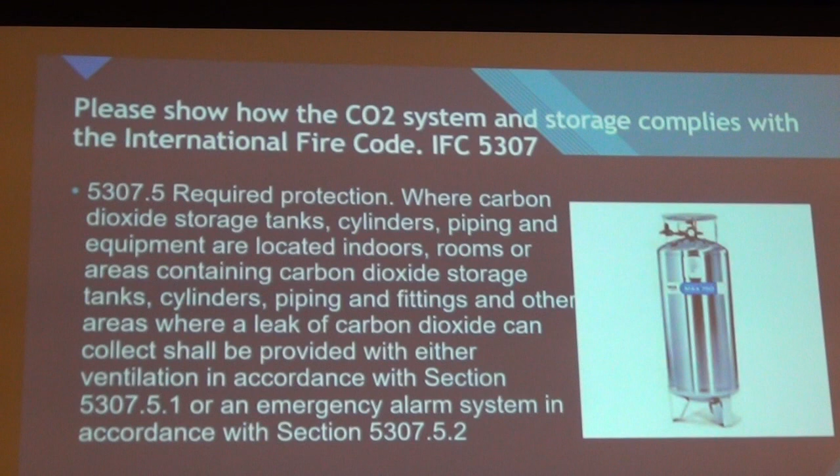So is multifamily considered commercial or residential? They said single-family dwelling units. When does it kick in? Six units? Five and less are 1. Okay, and anything over 5 would be. Okay, so there it is. Norwood used to work for the state. And by the way, it doesn't matter what the BTU input is. It doesn't? Oh, okay. It used to. It doesn't anymore.

Can I add more on that CO2 thing, just real quick? We can teach the whole class on it, but there's just some bullet points I want to throw out there. Number 1 is, these beverage companies, they were the ones that were installing these systems for years with no permits, no licensing, and no detection, right? But when we all of a sudden regulate and say you need a detection system, who's the first one that wants to install said detection system? The guy's been doing this work illegally for years. Yep. Is he qualified? No, he doesn't know what he's doing.

They like to install those plug-and-play ones. So they brought a guy to some fire inspectors group. The guy came in and he says, yeah, these are pretty cool. You can just plug these into the wall and they're easy to install. And when he was done with his presentation, I said, can I say something? And I went over and I unplugged it from the wall, and I said, yeah, and it unplugs just as easy as it plugs in. End of conversation.

The audible visual should be just as intelligible, visual, audible as a fire alarm system. As a life safety system, we have to back up and ask ourselves, why is this system here? Is it here just to look nice, or is it supposed to actually do something? It's supposed to get people out of the building, notify people, right? You can't do that with a little horn on the wall that sounds like your computer battery's low.

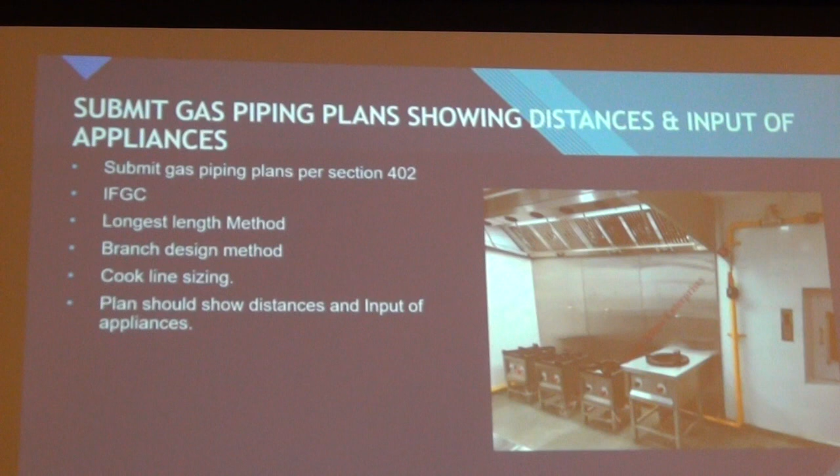Okay, this was a change in the 2015 code, and that is concerning, and I could teach like an hour on this, but we'll go over it real quick. Kitchen cooking appliance, type 1 or type 2 cooking hood, or the reasons for exemption per 507.1. What the code used to do, it used to list the appliances that you didn't need hoods. Well, they took that away and basically said all cooking appliances need hoods, but here we have exceptions.

And some of the exceptions are that it's been tested. What's that UL standard with the 5 milligrams or whatever of grease? Well, it also matches up with the NFPA standard 96. UL 710B. Okay, with that requirement, there's more to it than that. And a lot of people don't know that. That test that UL does actually will tell you what type of meats or what type of stuff was tested with it.

So if the test says boneless chicken, white meat, was done in the test, and they're using it to cook hamburgers, that's not what the test says. So each manufacturer will actually tell you the UL test results are based on what type of foods it was below that threshold. Do you understand what I'm saying here? That they're not out of the woods. Yeah, so you gotta look and see what they're gonna use this vent-free appliance to cook.

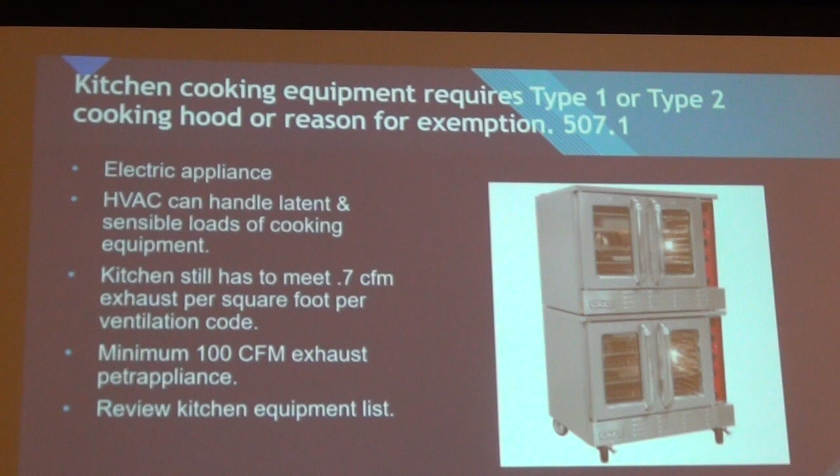Wow. But Firehouse Subs is one, they'll have all those hot water baths where they dip all the meat in to warm the meat up. There's a huge latent load. All right. And in the general statement in chapter 5 concerning kitchen exhaust, we do have to handle steam and heat, it says. So the way to do that is with an air conditioning system.

Provide information that all appliances regulated by the code are listed and approved. Certain kitchen equipment, especially those that are foreign made, some of the stuff, especially some of this Asian stuff, is not listed by a listing agency.

And you've walked into kitchens before, especially ethnic restaurants. I had one where they took an oven and got the whole oven out, and they cooked their ducks in there. And all they had was a manually lit burner going in there. I don't know where they got the burner, but it wasn't a standing pilot. That's illegal. I know. And you light the burner, and that's how they would cook their ducks or goose or whatever.

Remember Christmas Story? That duck was smiling at the guys and chopped the head off.

So that was a type of restaurant. It was a buffet type restaurant. And I said, no, you can't have that. And then the other thing is the cut sheets will usually state the listing agency. Then I applied for a code change and it got knocked down.

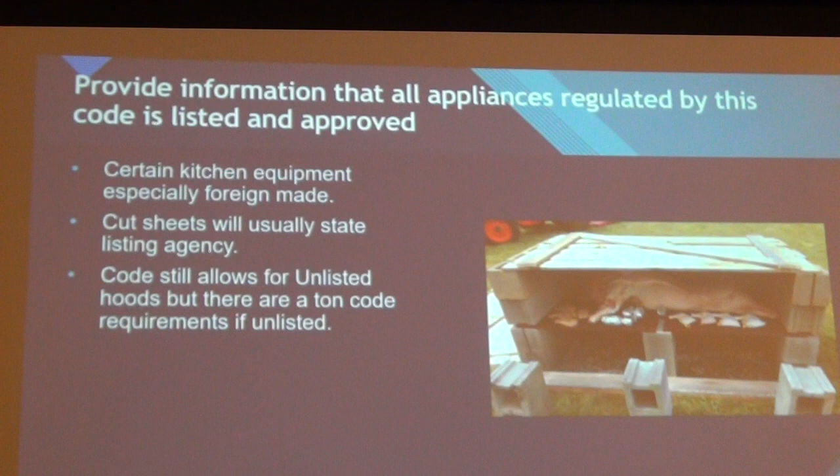Well, we get stuck with this sometimes. Yeah, we've been there. Provide information that the cooking hood provides the required CFM per the type of cooking done. In other words, the cooking hood will tell you how many CFM are required depending on what type of cooking you're doing: light duty, medium duty, heavy duty, or extra heavy duty. So you want to find out if that hood can handle the appliances that they're putting underneath it.

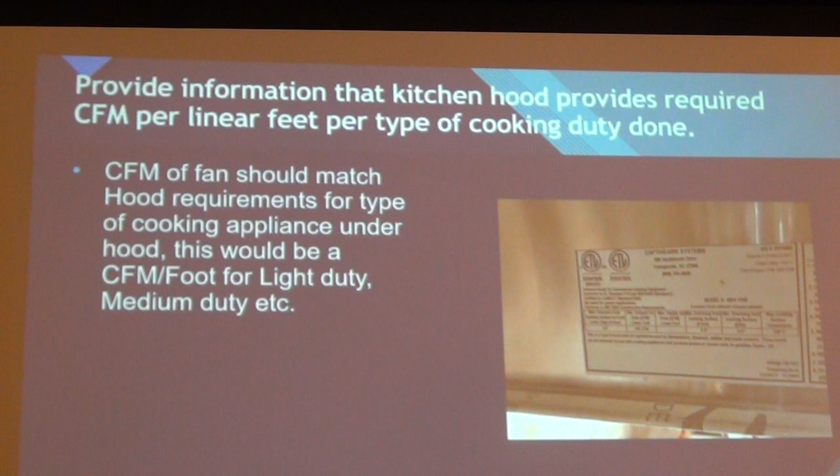In the next section, well, that's a double, hold on. That was your code change anyway, wasn't it? Yes, I'm proud of that.

What happened was, if you looked at the labels, and CaptiveAire finally got online with me for that. I had a discussion of about half an hour with their headquarters. The label used to tell you how many CFM per linear foot per temperature of the cooking appliance. And we don't deal with that in the code. We deal with a list of light duty, medium duty, heavy duty, and extra heavy duty.

I says, well, that label, we'll see a slide here in a second, will have to state that on the hood, tell you that, so whatever the CFM per linear foot, and you make sure that on your balance report for the hood that it is providing that required amount of CFM for the type of hood required.

Kitchen exhaust termination. In Royal Oak, this is a real big problem because everything's crunched together, but you want to know how far the exhaust is from air intakes. They're showing here on this plan, this is good how they did this, they're showing all the distances for it. Also, the exhaust has to be 10 feet from the property line. There is an exception, you can go down to 5 feet if it discharges not onto the property line. As far as that goes, it's discharged away, so if it's an upblast, then it's fine.

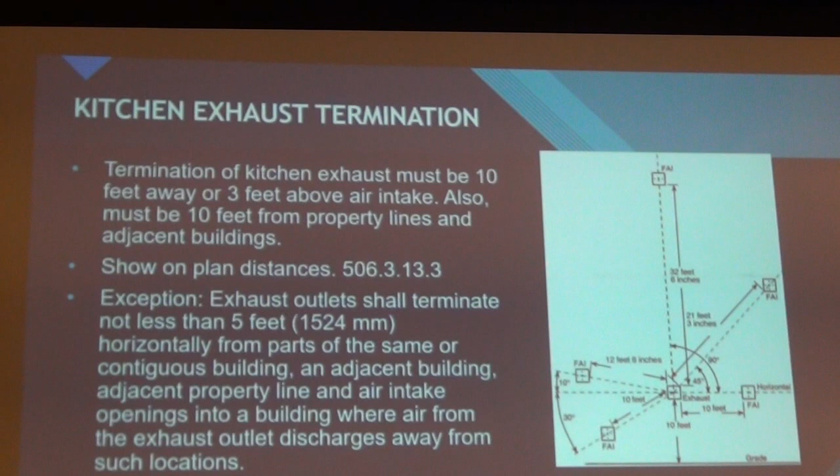Kitchen duct clearances, this is twofold of what you want to do. I hate McDonald's. They build them out of wood, and they have kitchen exhaust ducts going up through the wood. But their hoods though are listed to be put on a combustible wall. McDonald's builds their own hoods. But two things happen here. You want to make sure you have the proper clearances.

And by the way, if we ever do adopt a new mechanical code, the NFPA 96 statements will be taken out, except for the one statement in the ICC code. Mark, you mean they won't be referencing NFPA 96? They won't reference NFPA 96. They want to take that out and just go straight with the code. And it will describe the requirements and installations? Yes, there's enough code language there now.

But the other thing, and I had this right now, Hopcat moved in Royal Oak to another place, and they want to run the kitchen exhaust ducts. It's non-combustible construction, but the kitchen is in the middle of the restaurant, and these kitchen exhaust ducts go through several other rooms before they go outside. So I wrote in my plan review this statement here, but then I put a note there: any kitchen exhaust ducts that leave the kitchen area have to be enclosed either in a shaft or a wrap all the way from the hood to the outside.

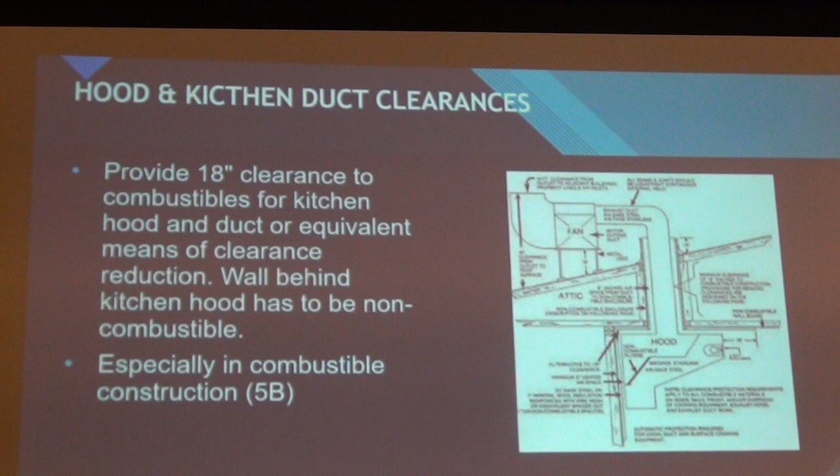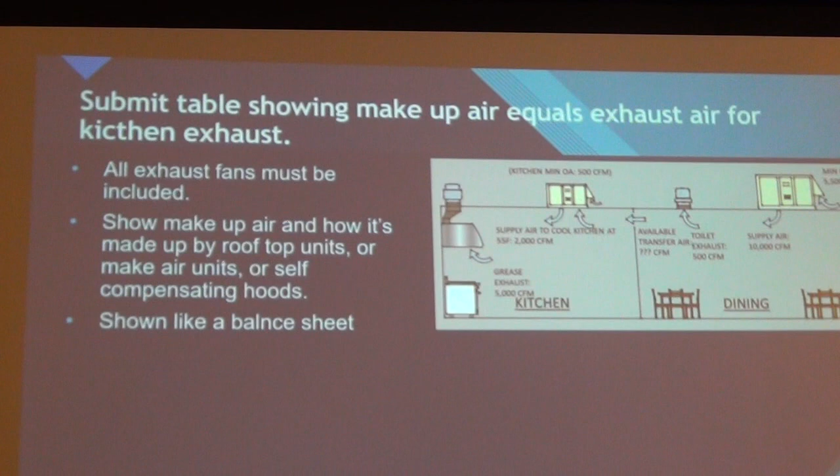You want to make sure that they show it balanced out. It doesn't have to be exact, but it has to be close, so that we have proper makeup air for that. How often will they accurately describe the sequence of operation? How they're interlocked? Right. The word interlock is not correct here. According to section 508 in makeup air, it doesn't say interlock, and I used the wrong word, sorry about that.

It says that the makeup air units and anything that has to do with makeup air has to automatically turn on when the exhaust fan is turned on. Because if you try to interlock the makeup air to shut down the kitchen exhaust if the makeup air units aren't running, you can cause worse things to happen than downdraft in appliances. And we'll talk about that in just a second here.

So what they'll argue, they say, well, the thermostat will make sure that the dining room units that are used for the makeup air will run. And I said, no, they won't. Somebody can flip it or change the program. I want it interconnected so that when the kitchen exhaust fan comes on, all the makeup air that is required runs, not only if there's a makeup air unit in the kitchen, but if they're using dining room units, which McDonald's is famous for. They don't have any makeup air units. They use the rooftop units in the dining room to make up the air for their kitchen exhaust systems. So when the McDonald's go on, I always make them hook it up.

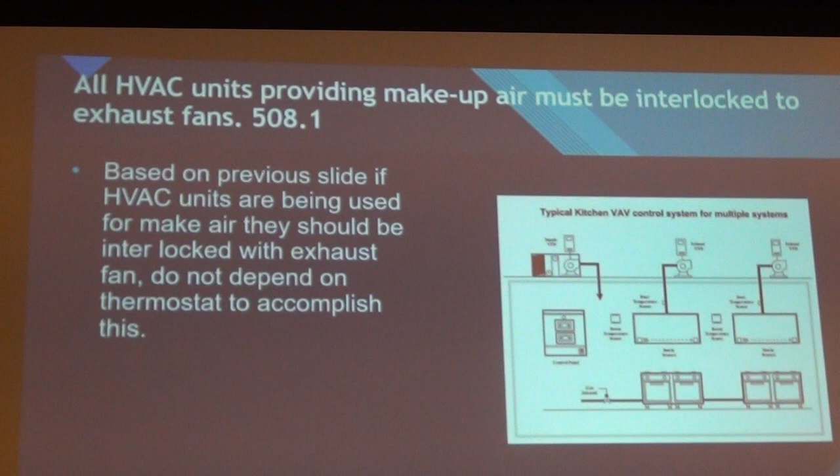So that's why we want to make sure of all the equipment, and they'll respond back. What they usually do is they'll actually show you a wiring diagram or put in a sequence of operation. So when you go to do the final, the contractor can't sit there and argue with you. That's the neat thing about when you do a thorough plan review. The contractor has no room to have any discussions about it. All you've got to tell them is, what's the plan say? And they'll say, well, it's supposed to be this way. So why didn't you do it? And he says, well, I didn't look at the plans.

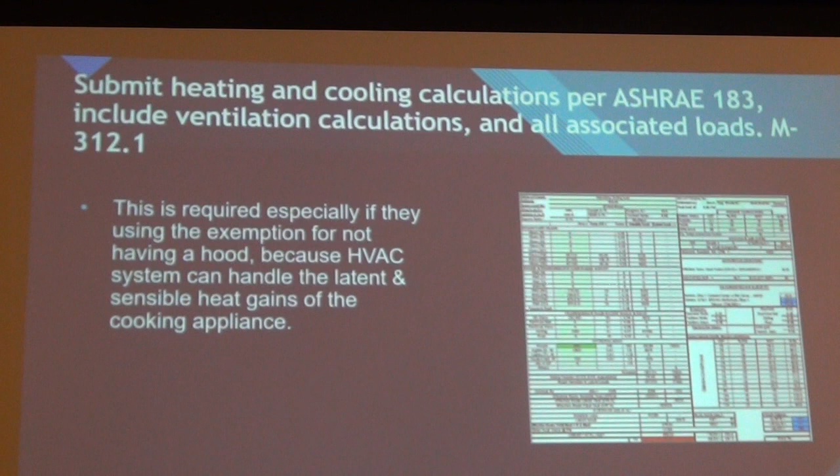And we talked about this earlier: submit heating and cooling per ASHRAE 183, if it's required, especially if the exemption is used; HVAC shall handle both latent and sensible loads. So this is just basically redundant of an earlier slide.

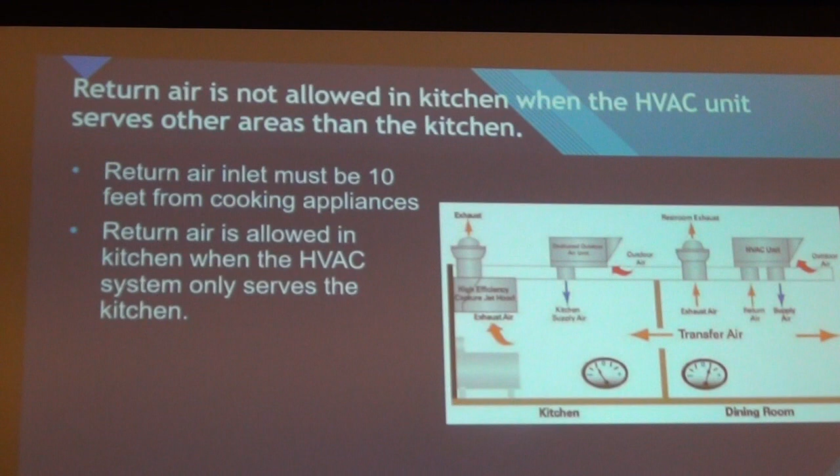Return air. I see this once in a while. It's not allowed in the kitchen when the HVAC unit serves other areas than the kitchen. If they have one heating and cooling unit for both the kitchen and the restaurant, which would be a pretty small restaurant, then you have to make sure that the return air is in the dining room. I don't see this too often though.

This one is a big one, but we're getting away from this now because most of the water heaters are either induced draft or direct vent water heaters you're seeing in the kitchen now for kitchen use. In fact, did the health department one time not allow tankless heaters to be used? Yeah, for one time they wouldn't, but now they do. Because now they bank them, multiple. Sometimes storage tanks on top. What is the biggest violation you have with tankless heaters?

Mine is the manufacturers want 3 inches on the side, and they'll either put them next to each other or put them right up against the wall. And they just say, well, it's right in the instructions, it says 3 inches on each side. So that's my biggest violation, the location, how they locate them. They think they don't need to have side clearance.

So here what we have is in case the makeup air fails, and if we have any sort of appliances that are gravity vented, we have to either install them in an isolated room with outside combustion air being brought in, or we have to go with a direct vent appliance. Because if the makeup air fails or if it's not properly maintained, then we could go into a negative and a gravity vent appliance will start spilling out of the

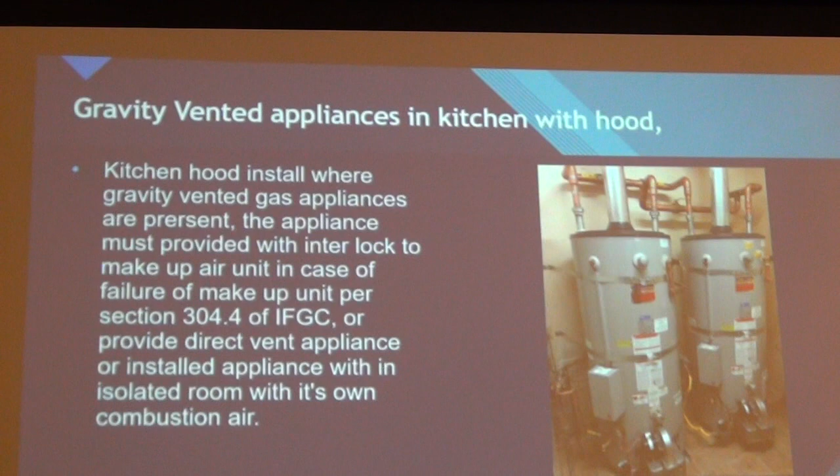Demand controlled ventilation. This is something out of the energy code. It was increased since the last change. There is an exception for this, and that is it's not required for the dining room if the outside air is used to make up the air for the kitchen. But anytime you have an occupancy greater than 25 people per 1,000 square feet, they have to have a demand control.

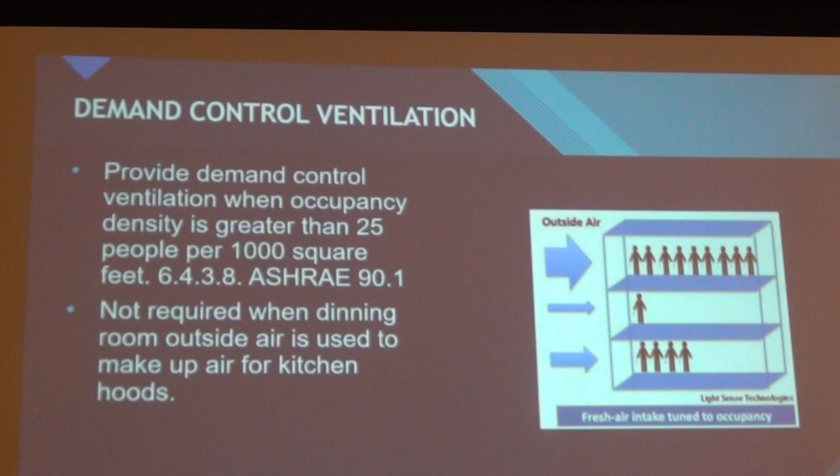And I don't have time today to go over it. What it does is it has CO2 monitors that regulate how much outside air is being brought in based on how many occupants are in the room. You find this in restaurants, and usually churches and theaters have to have demand control ventilation, depending on how many occupants they have.

Makeup air temperatures. This is something I learned at the last code change here, and somebody mentioned this. I never realized this, but the makeup air has to be within 10 degrees of the room air temperature, and that's both for heating and air conditioning. You have to also air condition the air. That's why I'm showing you a makeup air unit with refrigeration units.

Now, in the commentary, there is a statement, and it makes sense: if the makeup air grills are right next to the hood, then you don't have to technically temper it. So that's what I'm saying here, makeup air needs to be cooled, not only heated, in some cases, if the makeup air registers are kind of far away from the hood. Because that's how the code is read. I always thought it was just heating only.

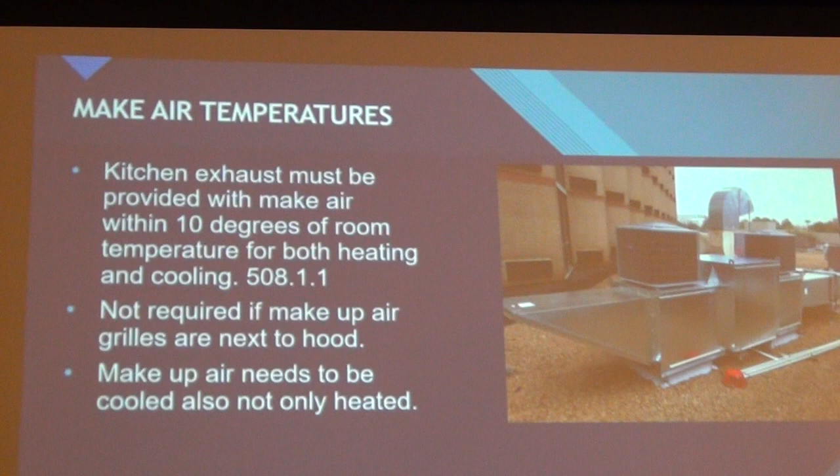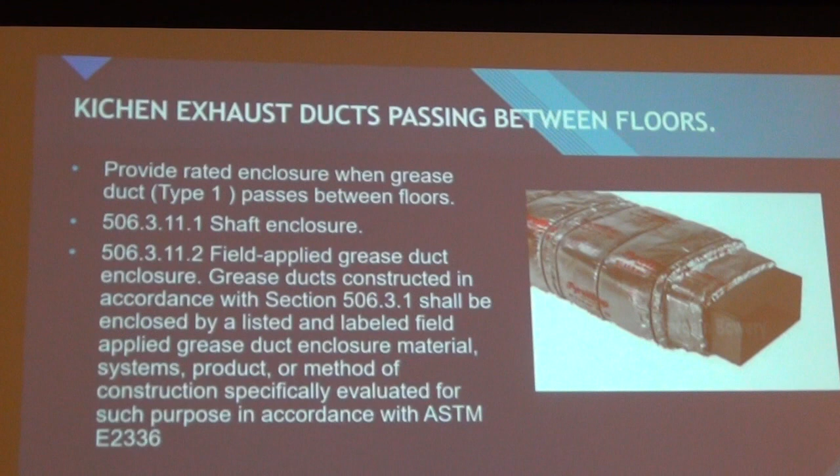Kitchen exhaust duct between floors. We talked about this a little bit earlier, about the wraps and enclosure material. And there is an exception here that if it's going from the kitchen right up through the roof, and it's a one-story building, then it doesn't have to be wrapped as long as the clearance requirements are met.

Okay, we're almost done here.

Propane. All the commercial freezers out there right now are being fitted with propane. And the problem with that is the refrigeration code has some things to say about it. Now, I hear people say, oh, but no permit's required because it's under a certain horsepower. There's a section where the code says, even though a permit is not required, the installation still has to meet the code. Well, here's what happens.

It says here, in non-industrial occupancies, A2 and B2 refrigerants shall not be used in a high-probability system where the quantity of refrigerant exceeds the table, and I'll show you the table in a second. Group A3 and B3 shall not be used except where approved. That word approved is italicized, and that's according to the AHJ, authority having jurisdiction.

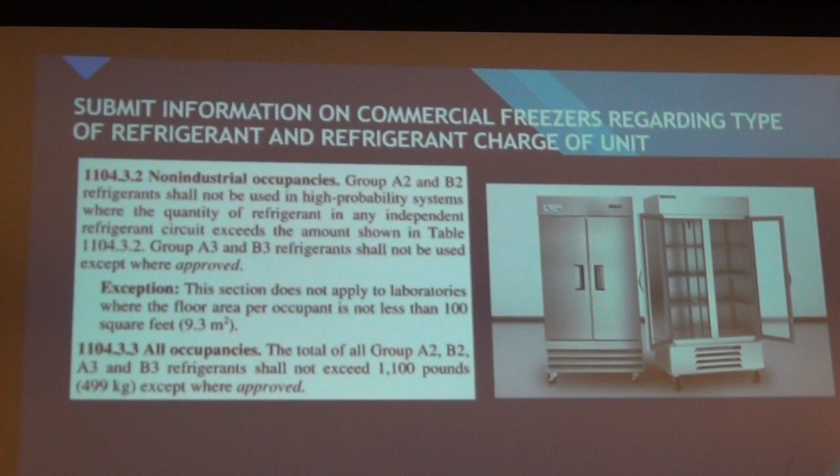I got one more thing here. That was it. So in ASHRAE 15, it says if it's less than 1/3 of a pound, it's okay. But then ASHRAE turns around and says if there's a conflict between ASHRAE 15 and the building codes, then the building codes take precedence. And ASHRAE 15 is a reference standard.

So the reason why they're using propane, a flammable gas, is for global warming. When I was taught back in the old days at Ferris State College, the refrigerants we had then back in the 70s were not toxic and they were non-flammable. But now we're going back full circle and using propane. So that's up to you.

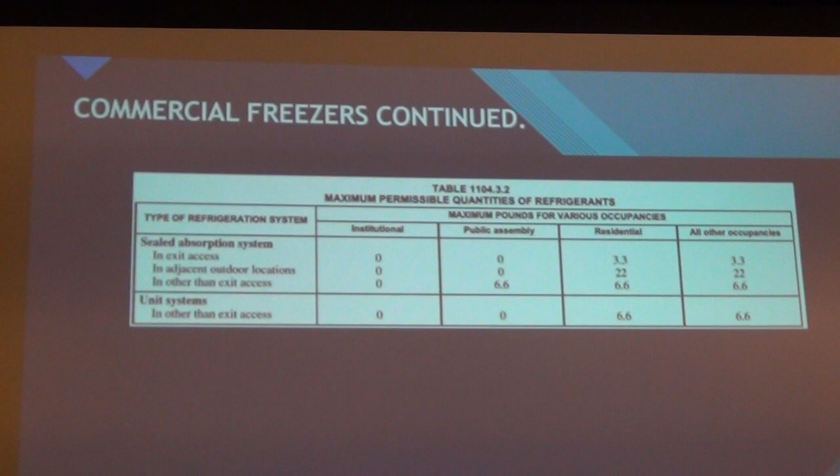Are there any questions? Mark, I got a question. Dishwashers in kitchens. Some dishwashers are low temp, some of them high temp. High temp would require a type 2 hood. Okay, low temp. Some municipalities still require a hood, even though it's low temp. For the manufacturer's instructions? It's 120 degrees or less, and they depend so much on chemicals, they don't depend on hot water. How can we answer that?

And even though in the code there's an exception, as long as you can integrate the load into the cooling system or the heating system itself. Right. But if the manufacturer's instructions are more stringent than the code, then the instructions take precedence. That's how you would do it.